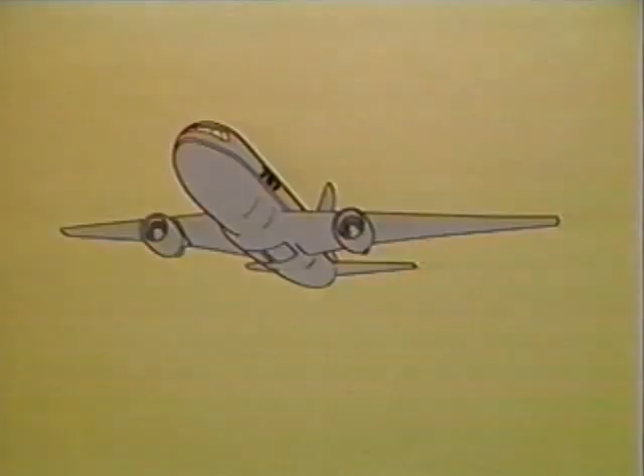The latest technologies in design have been employed to provide high reliability and low maintenance. For example, 3 independent hydraulic systems provide power for normal operation. Where possible, serviceable components for each system are grouped in one location for ease of maintainability.

Common components are used wherever possible, allowing interchangeability. Tubing runs are routed so that no one major malfunction incapacitates more than one system. Erosion is reduced through the use of BMS 3-11 Type 4 fluid.

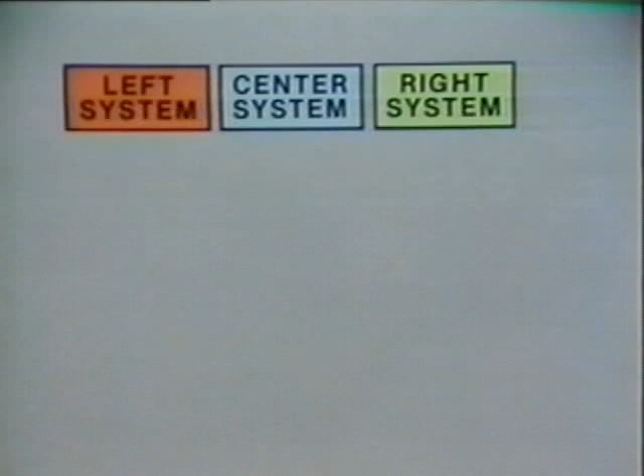The 3 independent hydraulic systems are the left, the center, and the right. They are color-coded, red, blue, and green, for system identification. Each system provides 3,000 psi pressure.

The primary flight controls, consisting of the autopilot and central control actuators, spoilers, ailerons, elevators, and rudder, receive power from all 3 systems. This provides triple redundancy for the main flight controls.

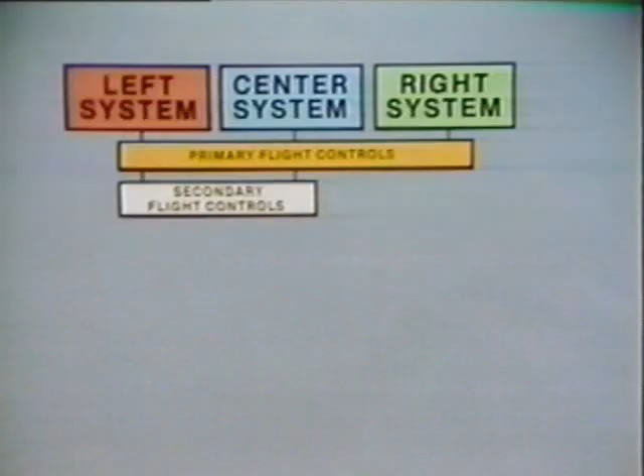Other controls, such as the elevator feel system, stabilizer trim, and yaw damper, make up the secondary flight controls. The left and center systems provide for their operation. The right system provides normal braking, and the center system provides an alternate and reserve brake system.

Single power services are the engine thrust reversers on both the left and right, and the leading edge slats, trailing edge flaps, steering, and landing gear, all in the center system.

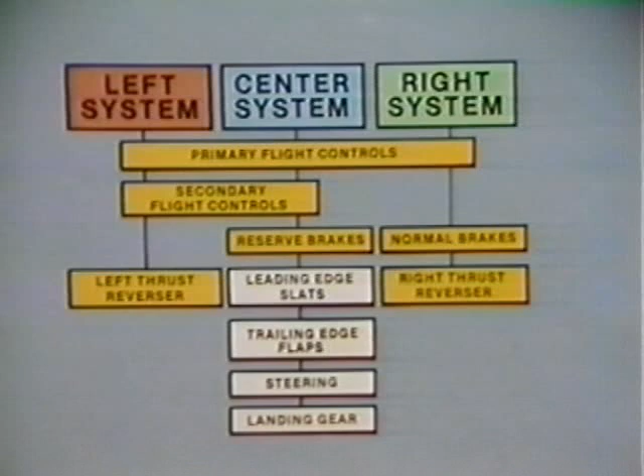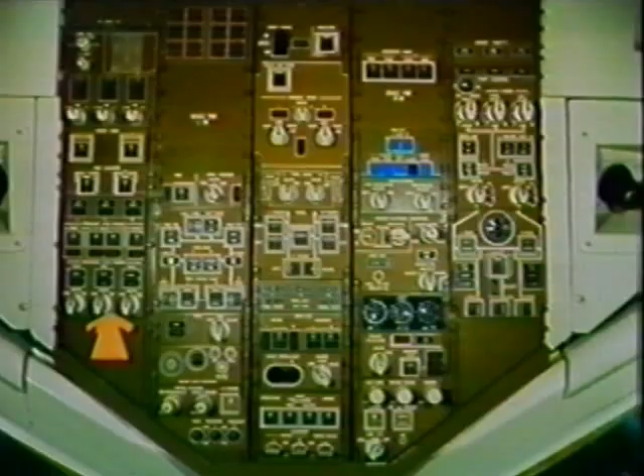The controls and indicators for the hydraulic system are located in the flight deck. They are primarily located on the P5 overhead panel. The controls for the left, center, and right systems are contained on this panel. Each system is arranged vertically.

Starting at the top of the panel: low pressure system lights, low hydraulic quantity lights, 4 primary pump switches, primary pump low pressure lights, primary pump overheat lights, demand pump low pressure lights, demand pump overheat lights, and demand pump switches.

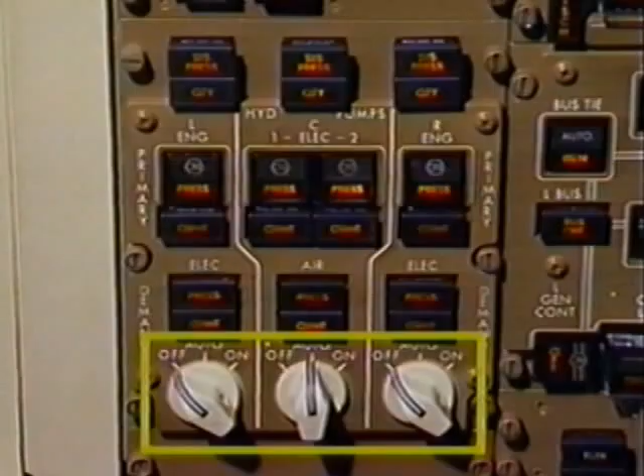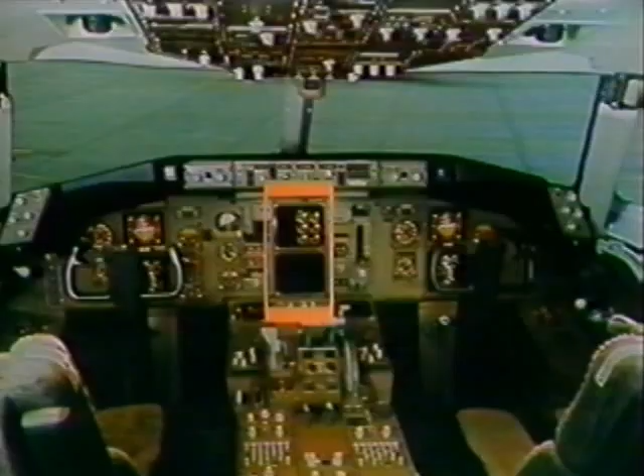Located between the P1 and P3 panels, the engine indication and crew alerting system, commonly known as EICAS.

The upper EICAS display will indicate the cause for any hydraulic warning light that appears. The lower EICAS display will indicate the fluid quantity of the reservoir on the status page. When requested, hydraulic quantity, pressure, and temperature are recorded for the EICAS maintenance page.

The P11 panel is located behind the P5 overhead panel. Hydraulic circuit breakers are located on the P11 panel. Located on the P6 panel are the main power circuit breakers.

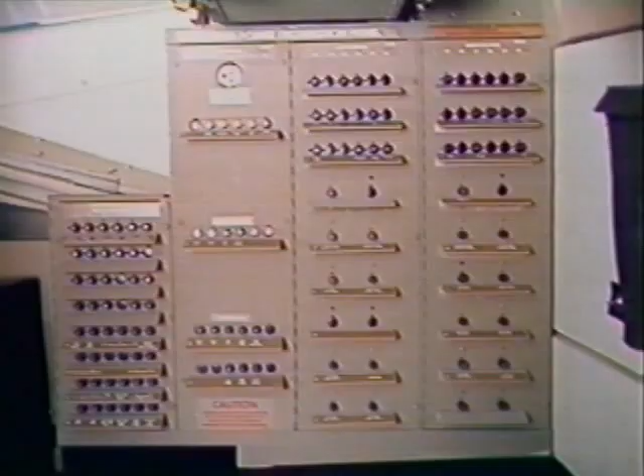The left and right systems are similar and are located around each corresponding engine. The primary pressure source for each system is an engine-driven pump, or EDP.

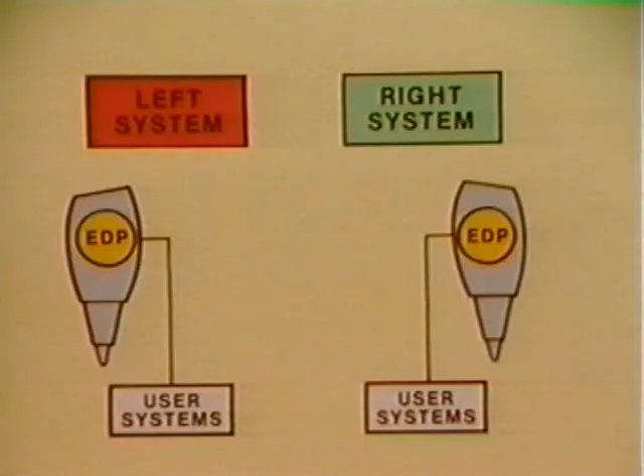Even at idle speed, the flow from this pump exceeds the highest demand expected for the operation of the flight controls on the left or right system.

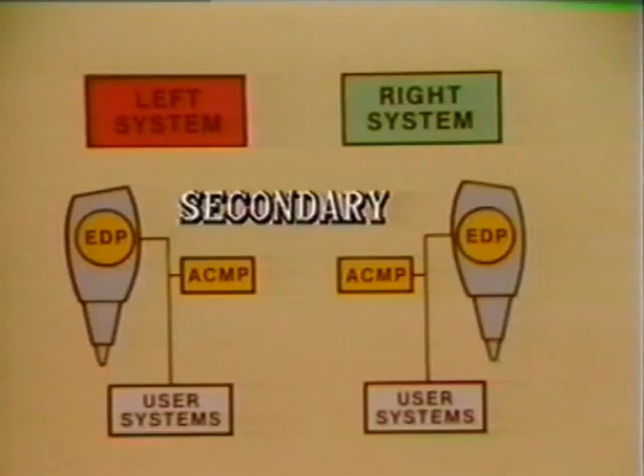The second pump in this system is called an alternating current motor pump, or ACMP. It is a secondary or demand pump. In flight, it is a backup source for the EDP. On the ground, it is used to pressurize the system without running the engines.

Let's look at a simplified flow diagram of the left hydraulic system. The EDP functions as the primary pump.

Hydraulic fluid is supplied to the EDP from a pressurized reservoir. Case drain flow cools and lubricates the pump. It passes through a heat exchanger before returning to the reservoir.

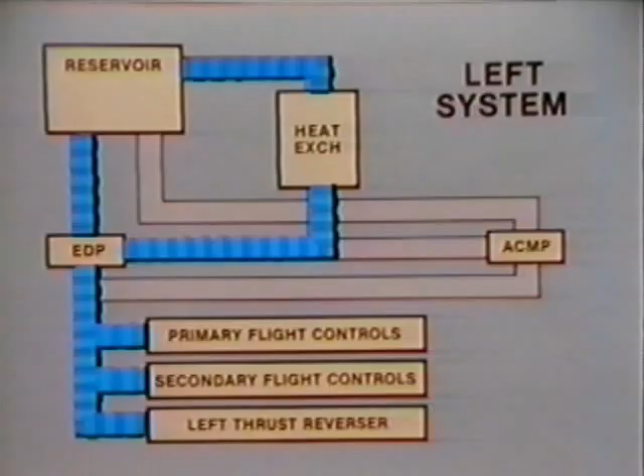The flow from the EDP provides pressure for the primary flight controls, the secondary flight controls, and the left thrust reverser. The ACMP provides a secondary source of pressure for the system.

Fluid from the reservoir flows to the ACMP. Case drain flow passes through the same heat exchanger before returning to the reservoir. The ACMP provides pressure to the same subsystems as the EDP.

In the reservoir, the EDP draws fluid from a standpipe. In the event of an EDP failure causing loss of hydraulic fluid, there is still some fluid left in the reservoir below the standpipe. Fluid is drawn from the bottom of the reservoir to supply the ACMP.

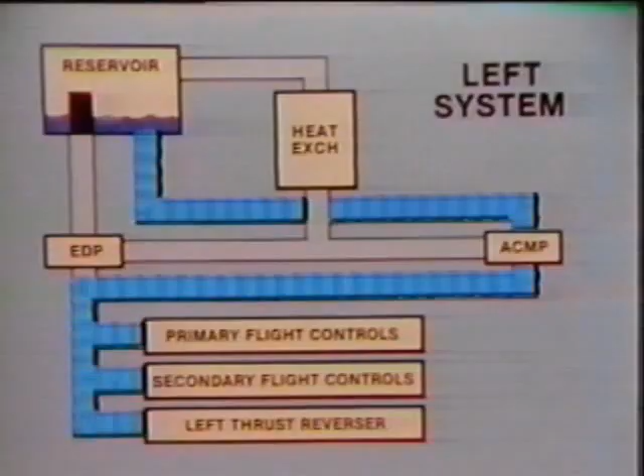The right hydraulic system operates in the very same manner. The only difference is in the user subsystems. The right system provides pressure for the primary flight controls, the brakes, and the right thrust reverser.

Hydraulic components associated with the left and right systems are located within the engine area and hydraulic bay area of each engine strut. Except for the reservoirs, the components are identical.

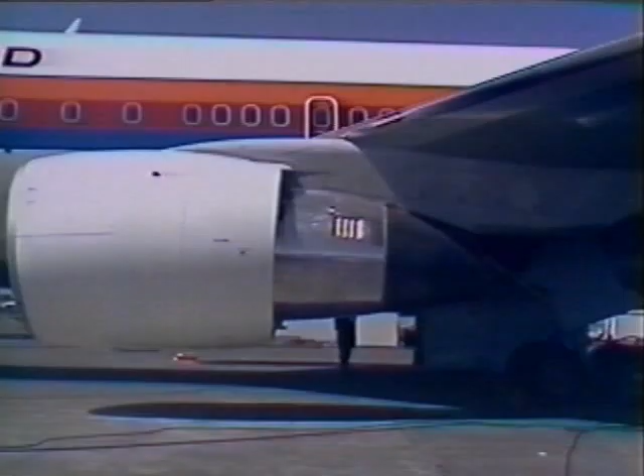They are located on the same side of the engine in a similar manner for each system. They are not mirrored. For convenience, only the left system components will be shown.

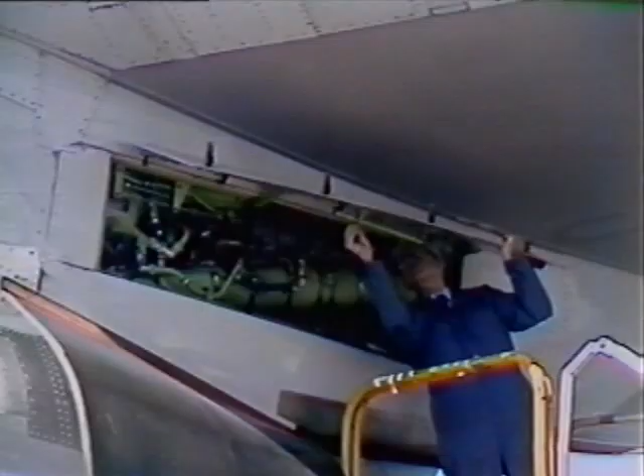The majority of the left system components are located in the left hydraulic bay of the engine strut. Access to the components is provided by opening the bay access door.

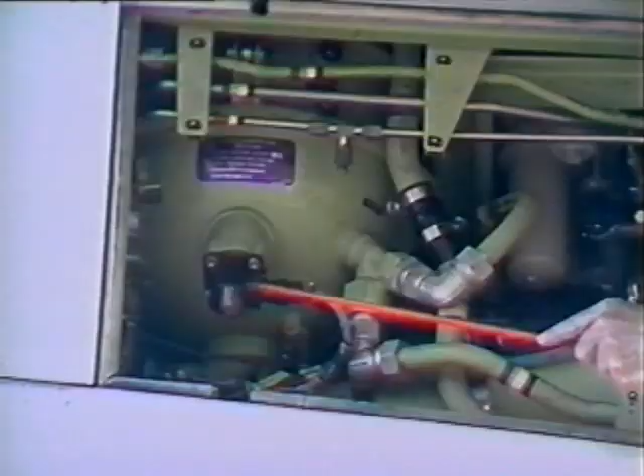The left system reservoir, the quantity transmitter. This provides a signal to the quantity light on the P5 panel and a quantity indication on the status page of EICAS.

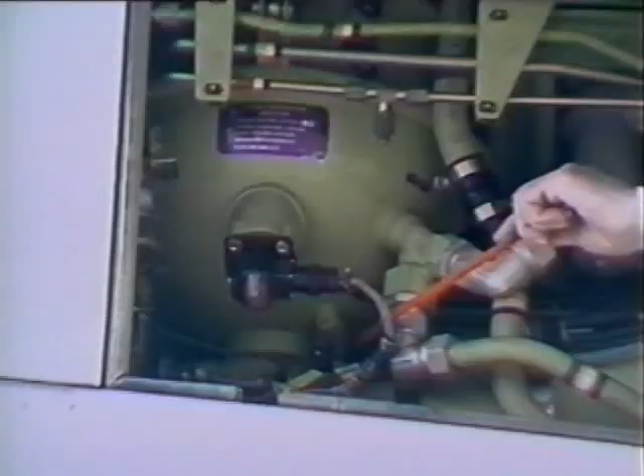The temperature transmitter. This provides a signal to the temperature indication on the electric hydraulic maintenance page on EICAS.

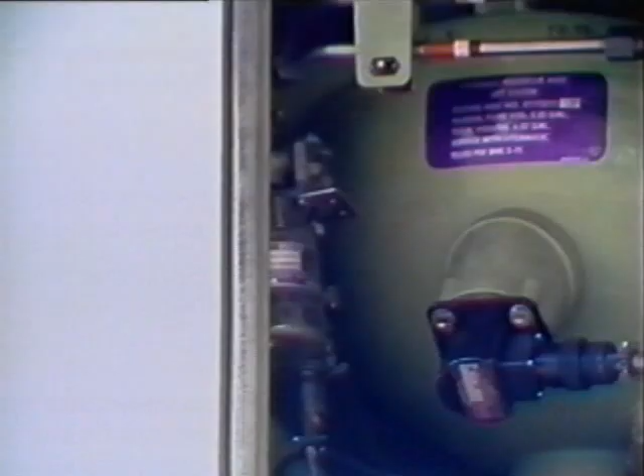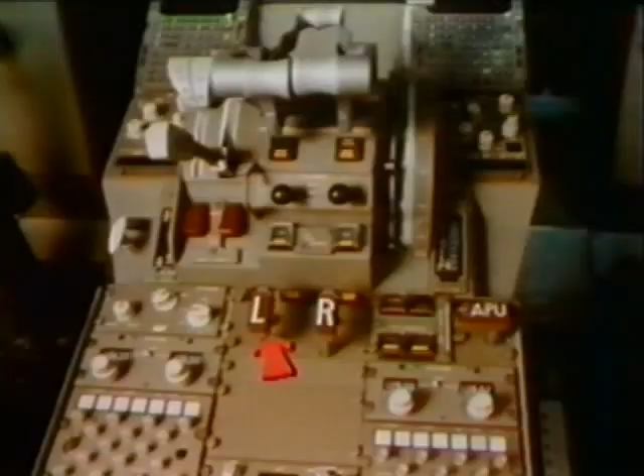Hydraulic fluid passes through a supply line to a supply shutoff valve. This shuts off the supply of hydraulic fluid to the EDP in the event of an engine fire. This valve is controlled by a fire shutoff switch located on the center aisle stand in the flight deck. The line from the supply shutoff valve goes forward and down to the engine area.

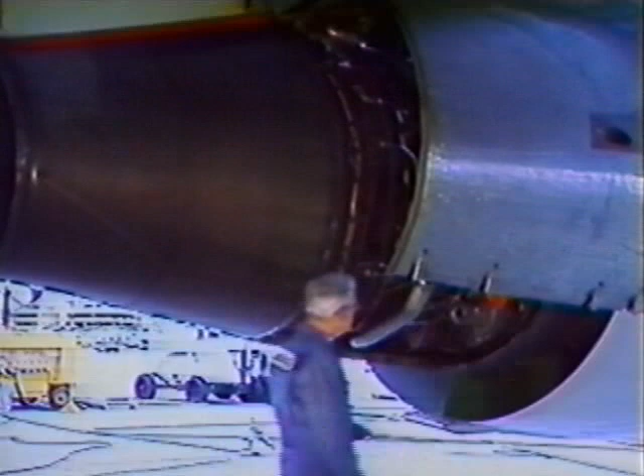Access to this area is provided by opening the engine cowling. Located on the right side of the engine is an engine-driven pump, or EDP. Located on the EDP is a depressurization solenoid valve. It is controlled by the pump switch on the P5 overhead panel.

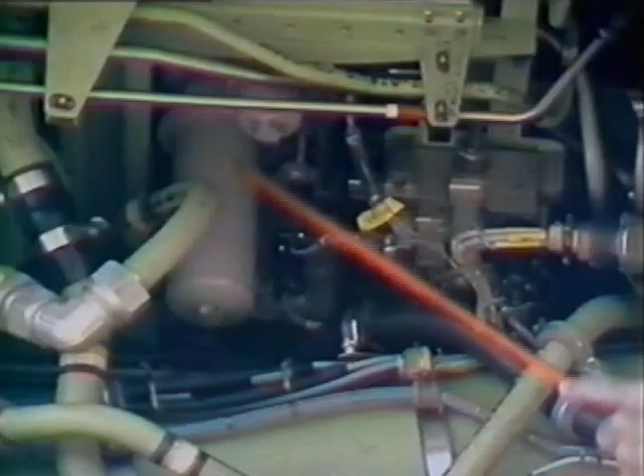The EDP sends pressurized and case drain fluid to the EDP filter module located in the hydraulic bay compartment. This filter module contains pressure and case drain filters, a pump low pressure and control pressure switches, and a case drain over temperature switch. The low pressure and over temperature switches send signals to the indicator lights on the P5 overhead panel.

Hydraulic fluid from the reservoir also flows to an alternating current motor pump, or ACMP. The ACMP is controlled by a demand pump switch on the P5 overhead panel. An overheat switch on the pump sends a signal to the overheat light on the panel.

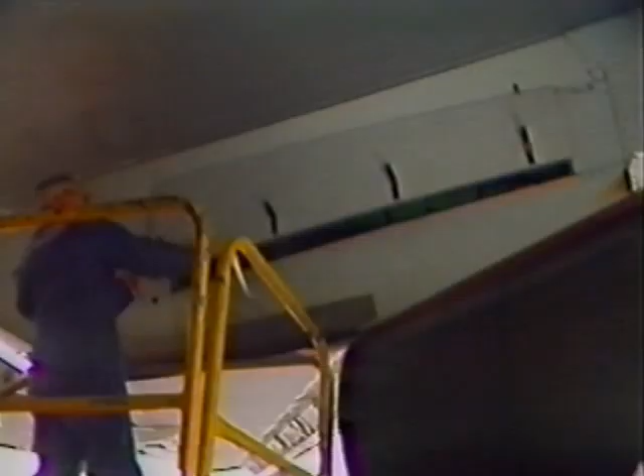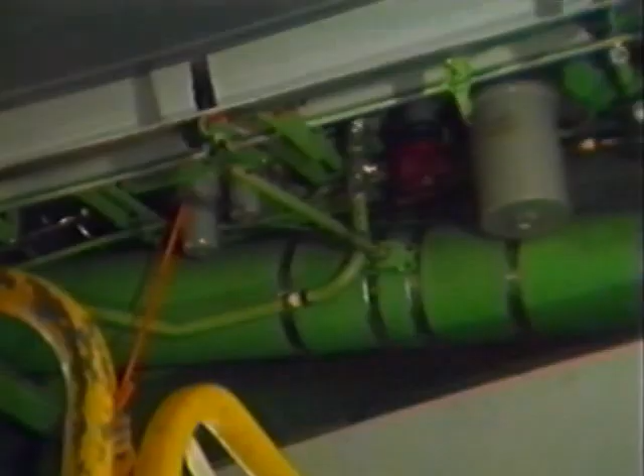The next components are accessed from the inboard side of the left hydraulic bay. The ACMP filter module, located on the module is a low pressure switch. This sends a signal to the low pressure light on the P5 panel.

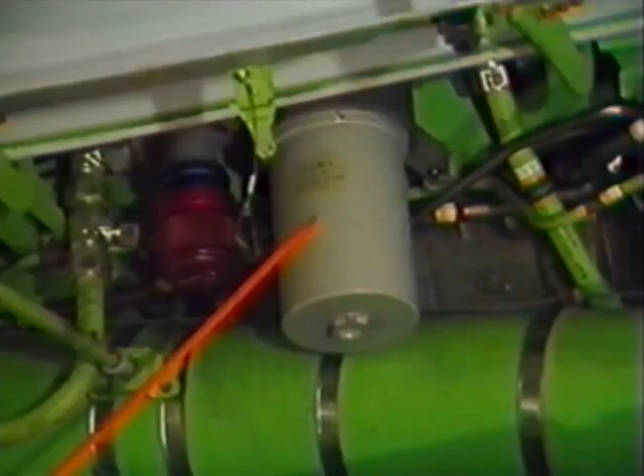Case drain fluid from the ACMP enters the same filter module and passes through the case drain filter. System fluid returns to the reservoir through the return filter module. There are two ground cart connections, pressure and return.

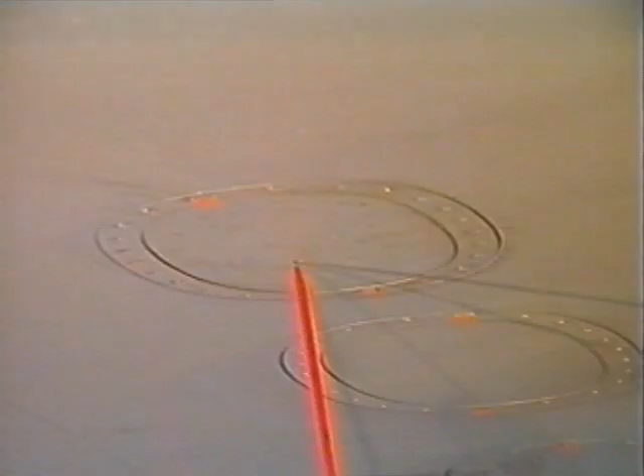Case drain fluid returns to the reservoir through a heat exchanger located in the fuel cell of the left wing. Access is provided through a panel on the wing. Both the center system and right system heat exchangers are located in the right inboard wing in a similar manner.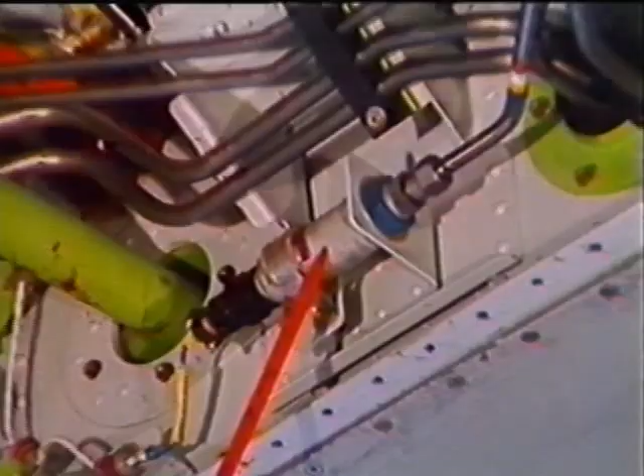Located after the heat exchanger is the left system pressure transducer. Access to the area is provided by removing a panel on the wing. Left system pressure is sensed by this pressure transducer located on the inboard aileron support rib. When requested, pressure is recorded on the EICAS maintenance page.

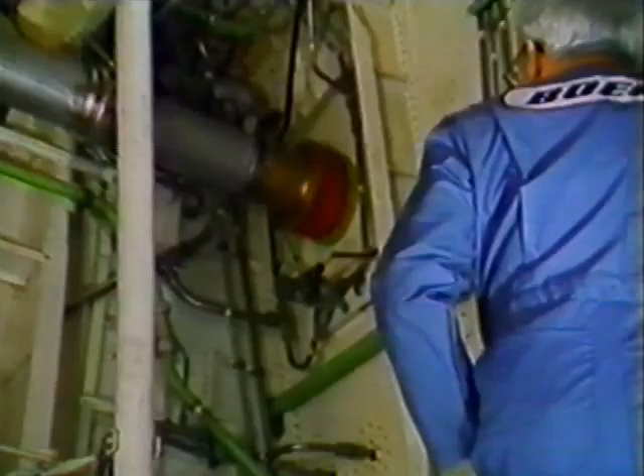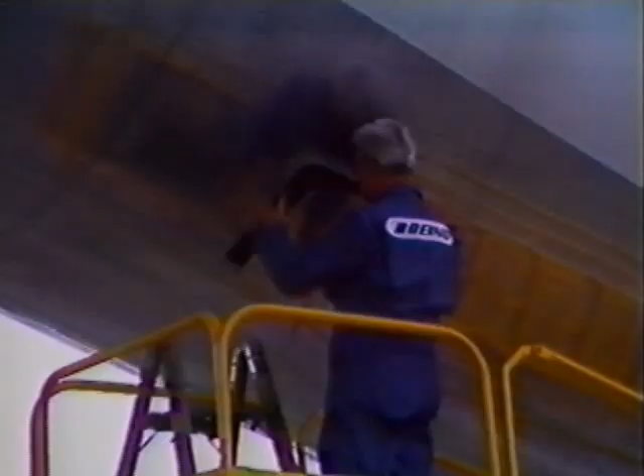A wing control isolation valve is also located in this area. A second wing control isolation valve is located on the left wheel well aft bulkhead. The tail control isolation valves are located in the aft end of the airplane, directly behind the pressurized bulkhead. Access is provided through the access door in the stabilizer jack screw compartment.

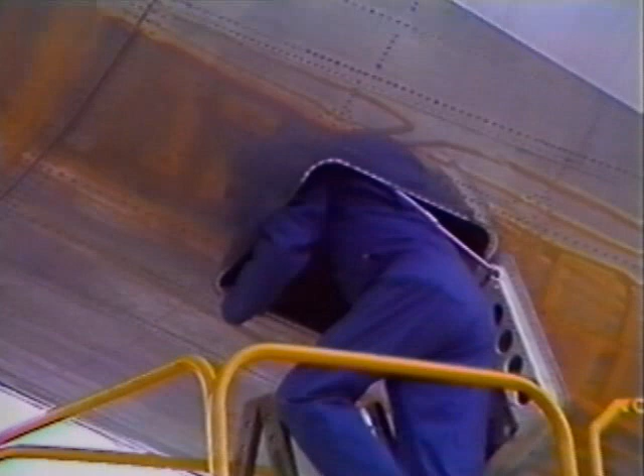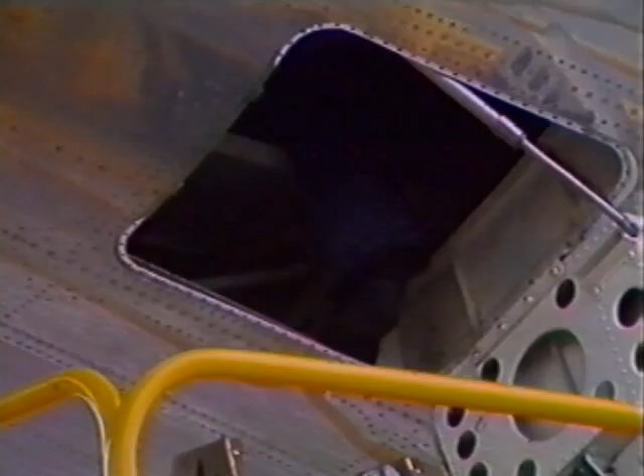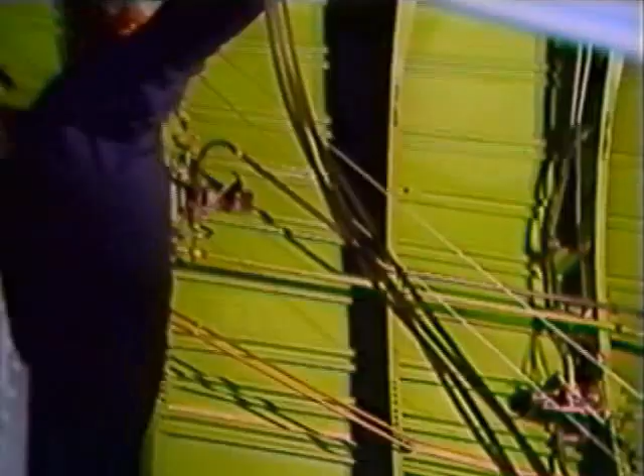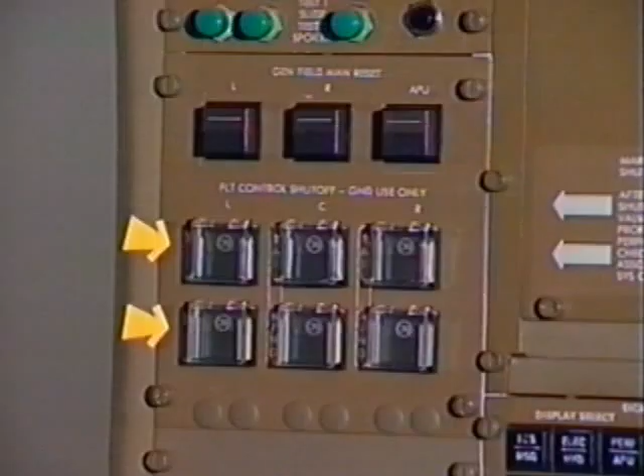Two isolation valves are mounted on the left sidewall. A third isolation valve is mounted on the right sidewall, directly across from the others. The wing and tail control isolation valves are controlled from the P61 panel on the right side of the flight deck.

The third hydraulic system on the airplane is the center system. Two ACMPs provide the primary pressure source for this system. These pumps have the same part number as the demand pumps on the left and right systems and are completely interchangeable. The flow from the two ACMPs will provide for most demands of the center system.

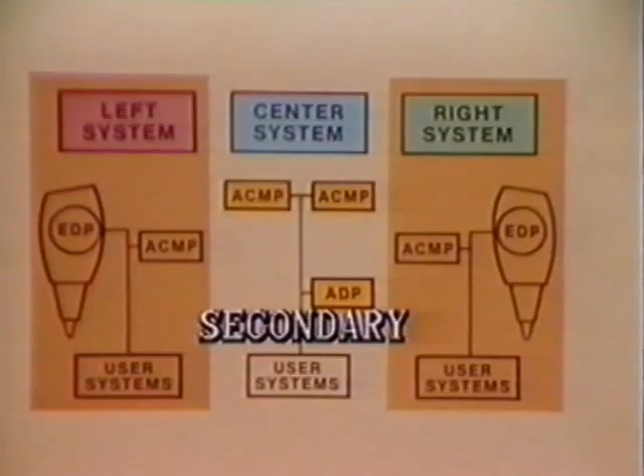The slats, flaps, and landing gear, however, are high-flow, short-time services requiring a high rate of flow. Therefore, an air-driven pump, or ADP, is provided as a secondary source to accommodate these needs. On demand, this high-volume pump will provide the increased flow required for these systems.

The last pump used in the center system is the ram air turbine, or RAT. This pump is used as an emergency source for supplying pressure to the primary flight controls.

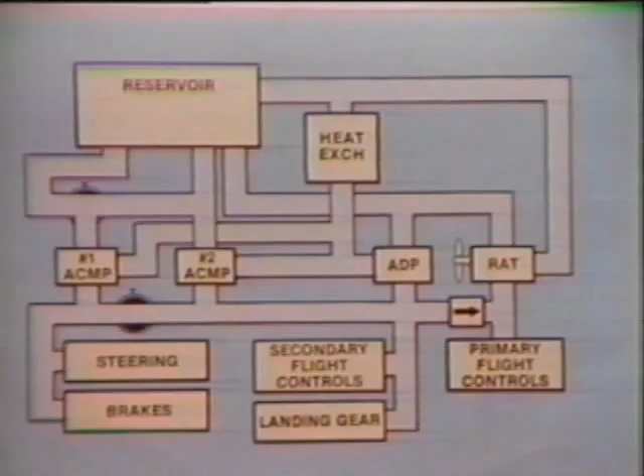Let's look at a flow diagram of the center hydraulic system. Two ACMPs provide the primary source of power. Hydraulic fluid is supplied to these pumps from a pressurized reservoir. Each pump uses case drain flow for cooling and lubricating and passes it through a heat exchanger before returning it to the reservoir.

Both ACMPs provide pressure for the primary flight controls, the secondary controls, landing gear, steering, and the brakes.

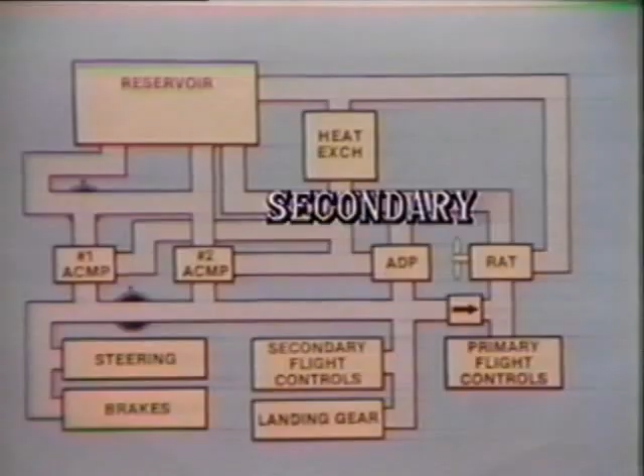The ADP is the secondary demand source of pressure for this system. Hydraulic fluid is supplied to the ADP from the same reservoir. Again, case drain flow returns to the reservoir through the heat exchanger. The flow from the ADP supplies the same user subsystems as the ACMPs.

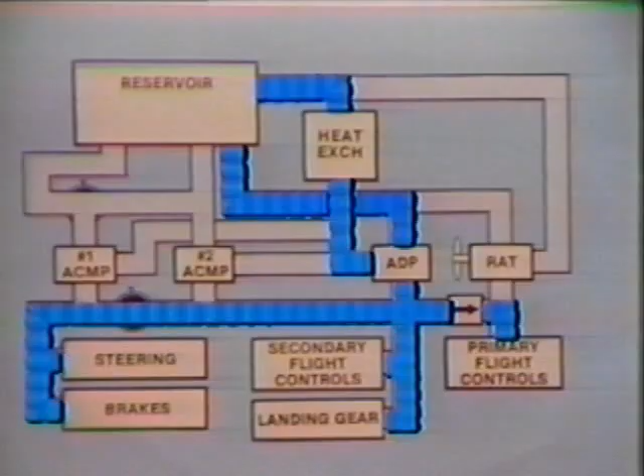During high flow demand, these three pumps operate together. The RAT provides an emergency power source. Fluid from the same pressurized reservoir supplies the RAT. The fluid is returned directly to the reservoir without passing through the heat exchanger.

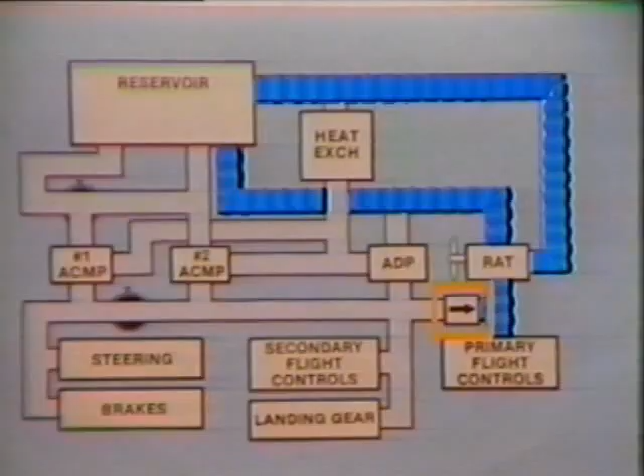When the RAT is deployed, the flow is blocked by a check valve to all subsystems except the primary flight controls. This provides for the operation of the flight controls during an emergency.

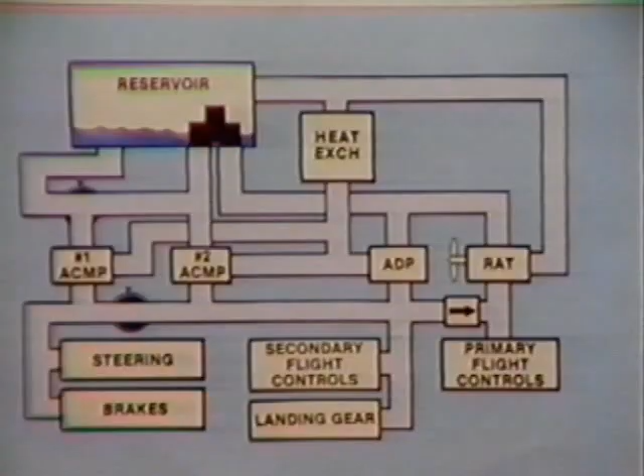A standpipe is located in the reservoir. It normally supplies all the center system pumps. Two isolation valves, when activated, will isolate this pump from the rest of the system. Reserve fluid from the bottom of the tank supplies the number 1 ACMP when isolated. Hydraulic pressure is then available to the reserve brakes and steering.

The components for the center system are primarily located in the right main wheel well area. Access to the components is through the right wheel well door. The center system fluid is supplied by a center reservoir.

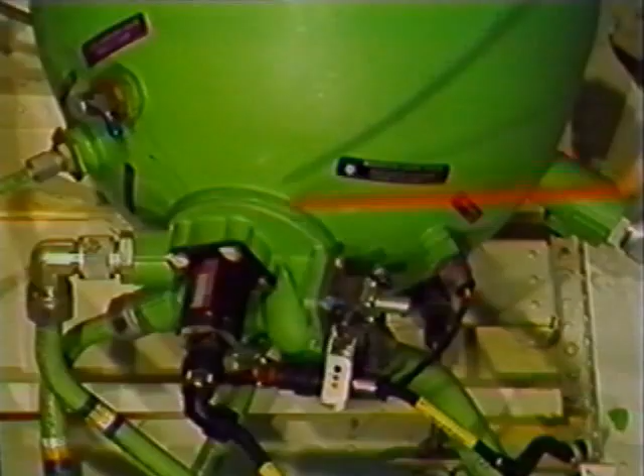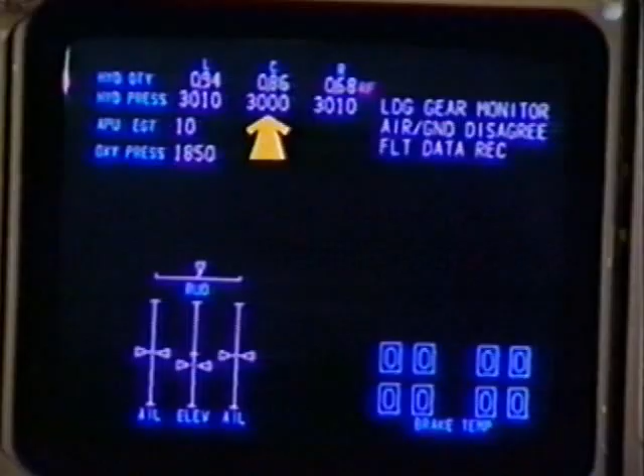Quantity transmitter, temperature transmitter. Hydraulic quantity is available on the EICAS status page. Hydraulic fluid temperature is available on the EICAS maintenance page.

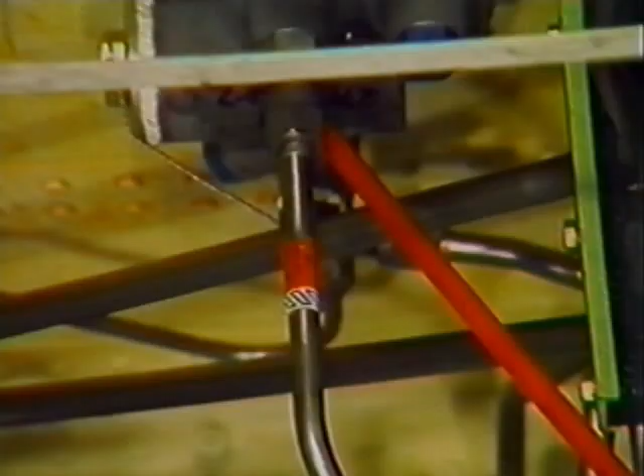Reservoir pressurization module. Depressurizing valve. Pressure supply shutoff valve.

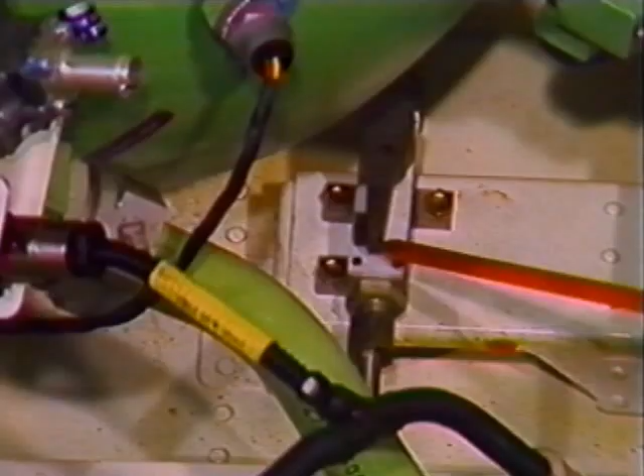Located on the keel beam, 2 ACMPs. A case drain overheat switch on the pumps provides a signal to the overheat lights on the P5 panel.

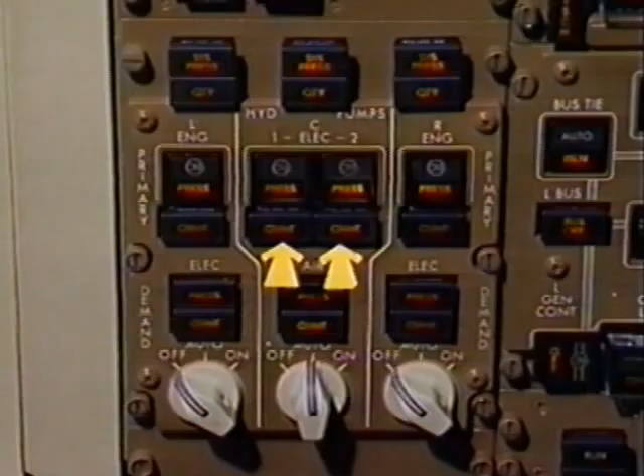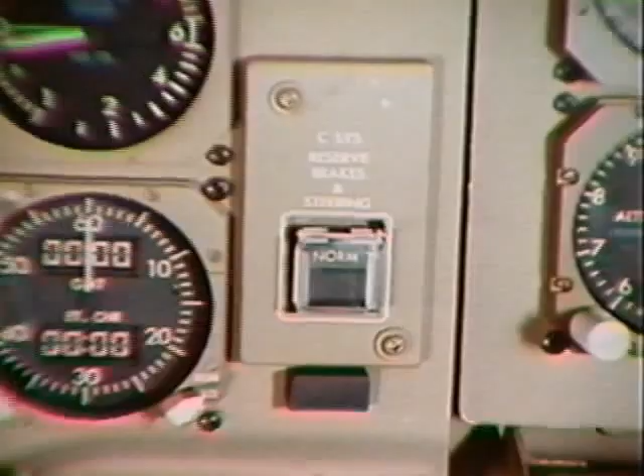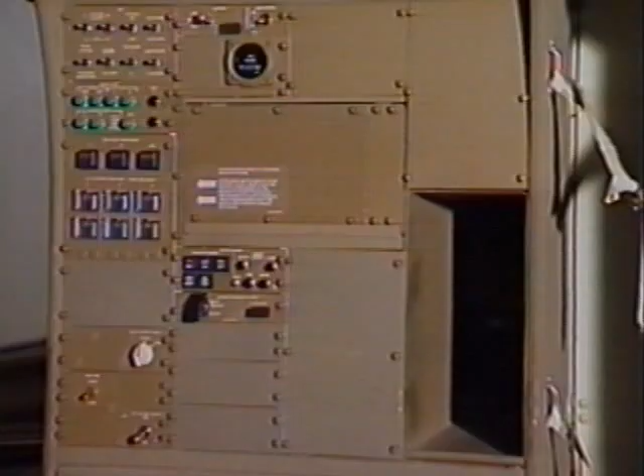There are 2 number 1 ACMP isolation valves. They are controlled by the reserve brake and steering switch located on the captain's P1 panel. These valves are also controlled automatically in the air by low center hydraulic system quantity. The system is reset by a switch on the P61 panel. There are 2 ACMP filter modules.

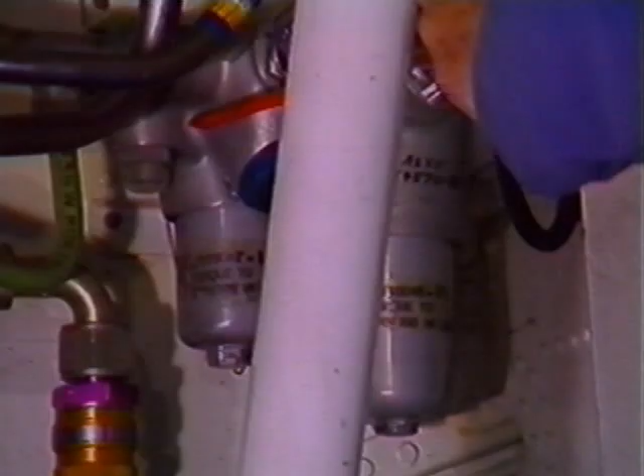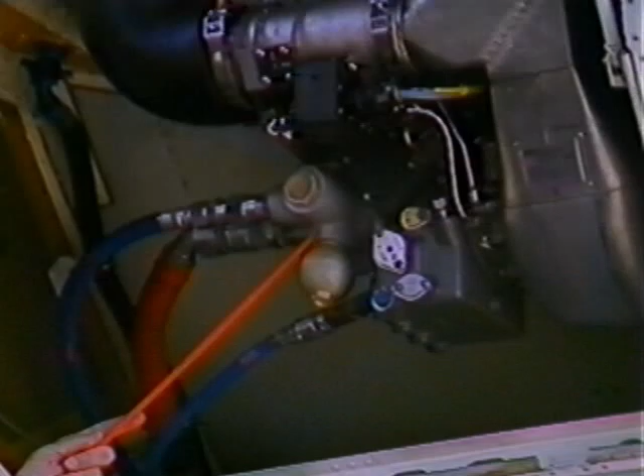The ADP, or demand pump for the center system, is located on the left-hand side of the airplane. Access is provided through a snap-fastened and hinged panel door. The air-driven pump, or ADP, is controlled by a pump switch on the P5 panel.

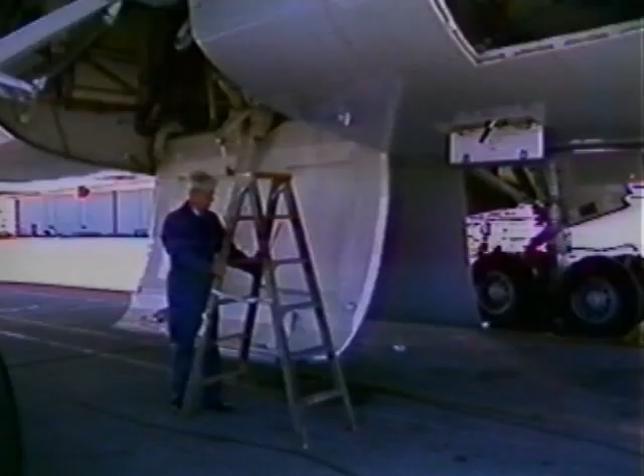Pressurized hydraulic fluid and case drain fluid go to the ADP filter module located in the aft end of the left-hand wheel well.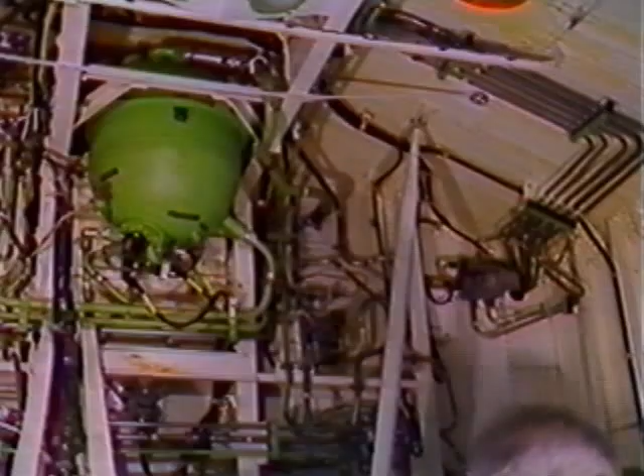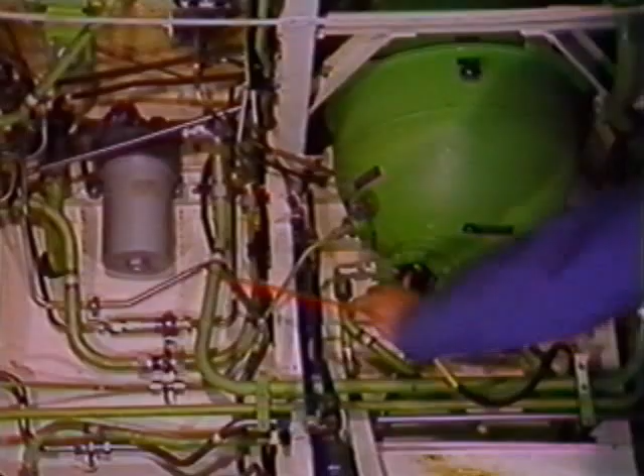In the right main wheel well, pressurized fluid from the center system is sensed by a pressure transmitter located above the pressure isolation valve. After passing through a heat exchanger in the right wing, fluid from the center system passes through a return filter module before returning to the reservoir.

Ground connections for the center system are located on the bottom of the keel beam between the 2 wheel wells. Access is provided through an access door. Pressure connection, return connection.

Located aft of the right main wheel well, just below the right wing body fairing, the ram air turbine, or RAT. Hydraulic fluid is supplied by the same center system reservoir. A manual deploy switch, located on the pilot's overhead P5 panel, extends the RAT.

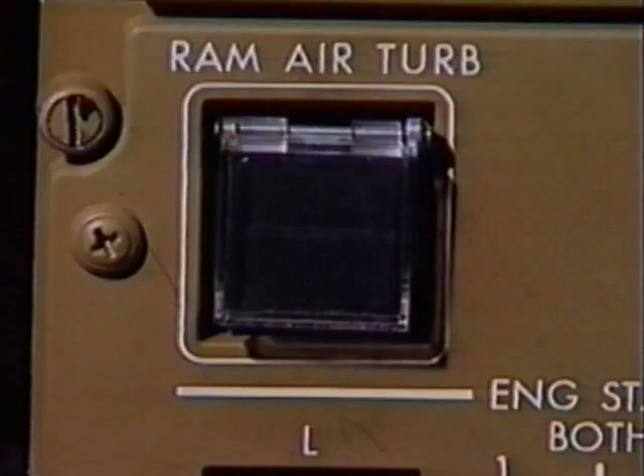The switch is guarded to prevent accidental deployment. In the unlikely event of a dual engine failure, the ram air turbine will automatically extend from the airplane into the airstream to provide an emergency source for supplying pressure to the primary flight controls.

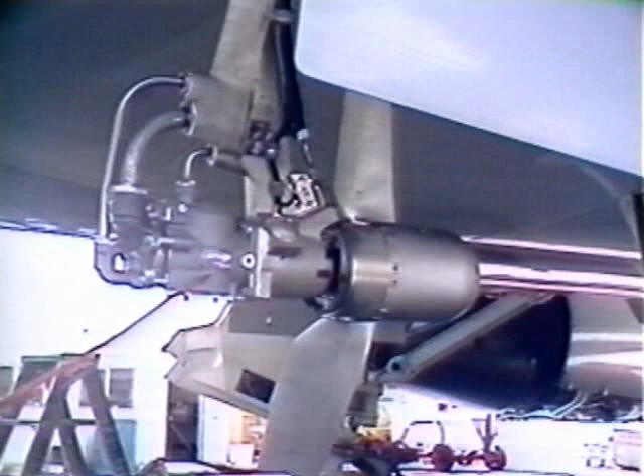The ram air turbine pump, located in the right wheel well, the RAT control and checkout module. Located on the module, a back drive handle, and a tachometer module.

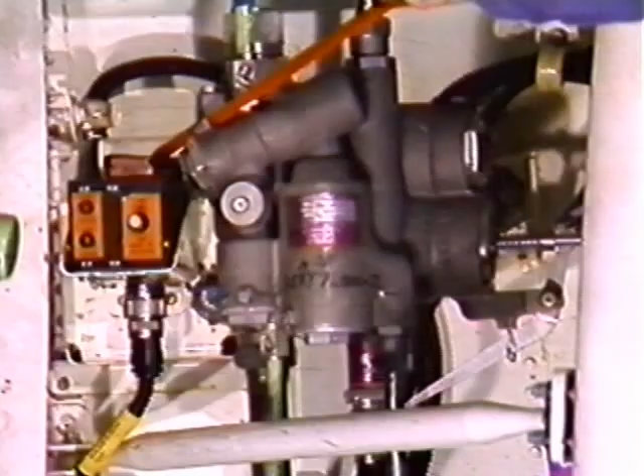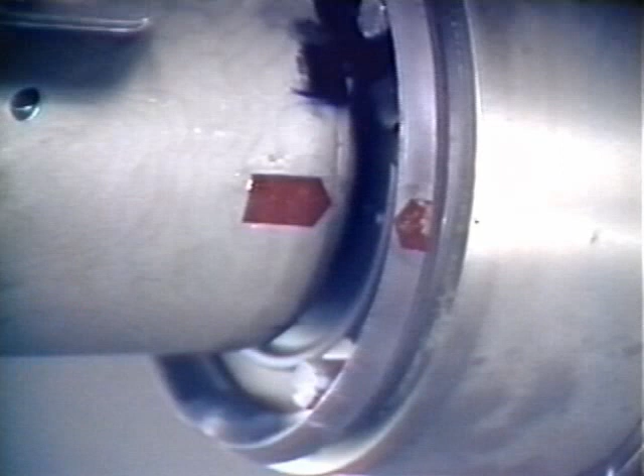A guarded switch, located above the tachometer module, provides for RAT retraction. Before the RAT can be retracted, indicator marks on the propeller hub and swing arm must be accurately aligned.

Let's briefly summarize the hydraulic system by reviewing the pumps. 4 different types of pumps are used in the 767 hydraulic system. The first type is the engine-driven pump, or EDP.

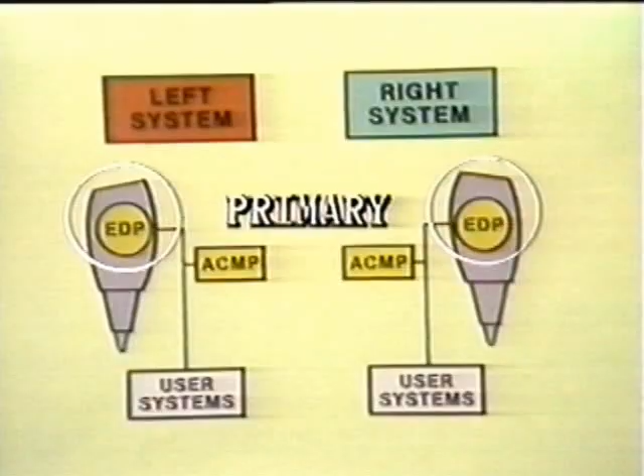One EDP is mounted on the end of each engine gearbox. Each pump provides a high volume rate of flow and serves as the primary pressure source for the left and right systems. The next type is the alternating current motor pump, or ACMP.

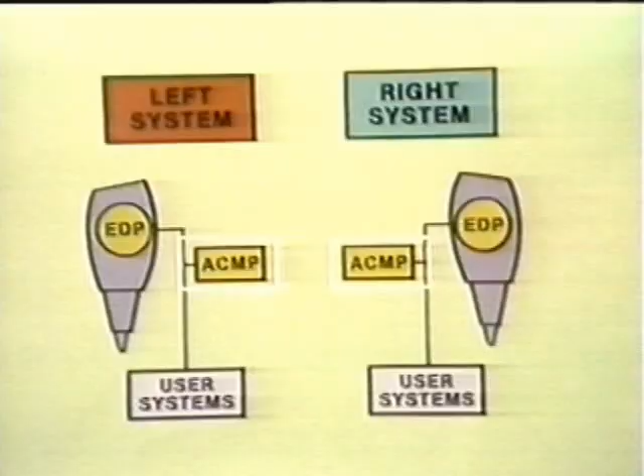A total of 4 ACMPs are used. One pump is used for the left and one for the right system. Each provides a secondary or demand source. Both of these pumps are located in the engine strut fairing compartment on each engine.

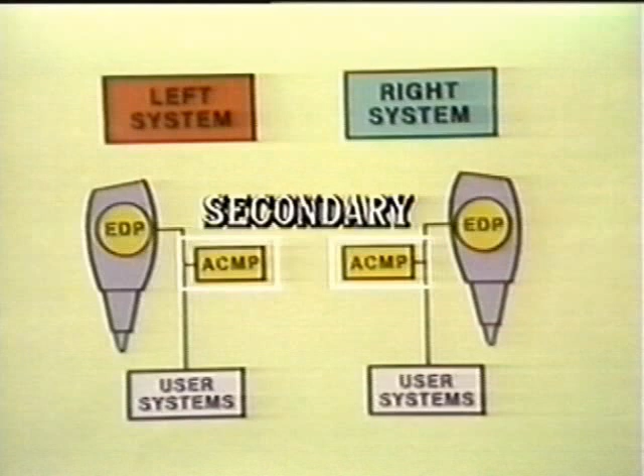The other 2 ACMPs are located on the keel beam of the right main gear wheel well. They provide for ordinary flight operations and serve as the primary source of power for the center system.

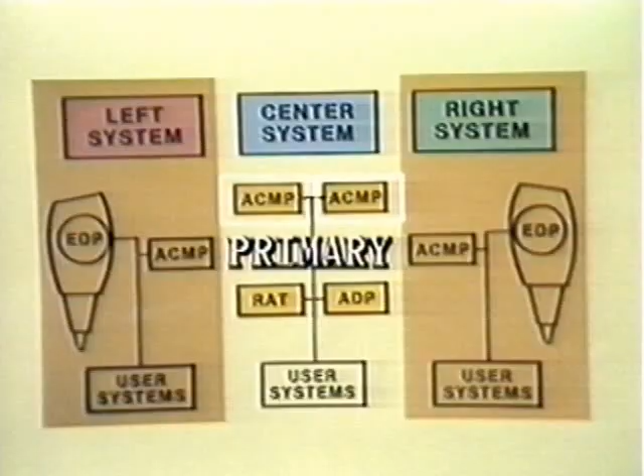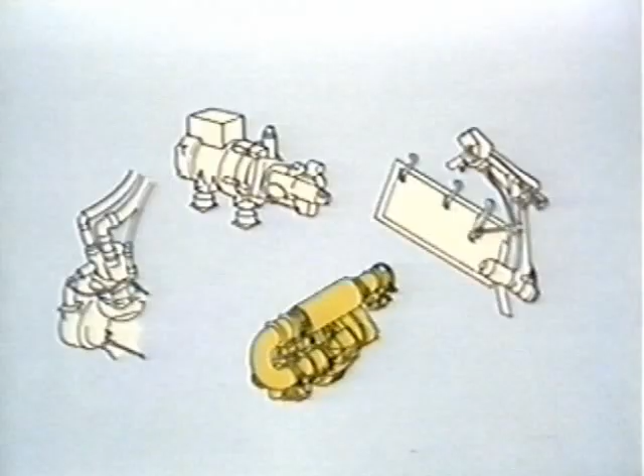The third type is the air-driven pump, or ADP. It is located in the left rear fuselage wing fairing. This pump serves as a secondary, high-volume demand pump for the center system.

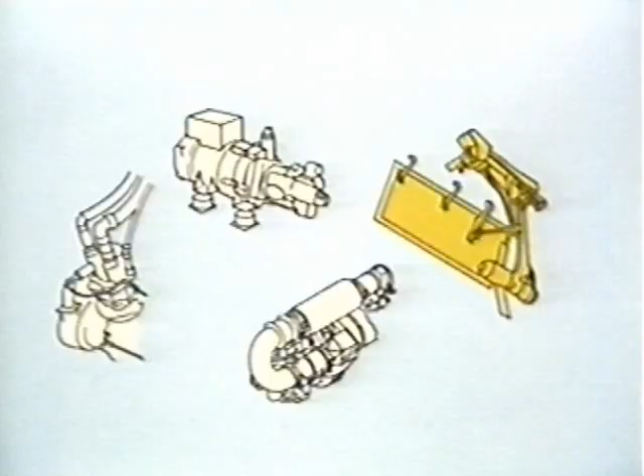The last type of pump in the hydraulic system is the ram air turbine pump, or RAT. It is located in the right wing body fairing aft of the right main gear wheel well. This pump serves as an emergency source of power for the primary flight controls.

In the event of a dual engine failure, the ram air turbine with pump extends into the airstream to supply pressure to the primary flight controls.

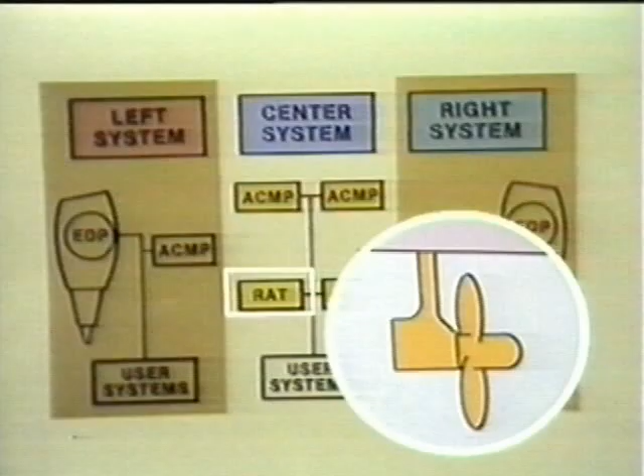This completes this module on the 767 hydraulic system. You have seen the location and function of each of the major components in this system and have been given a description of the system operation.